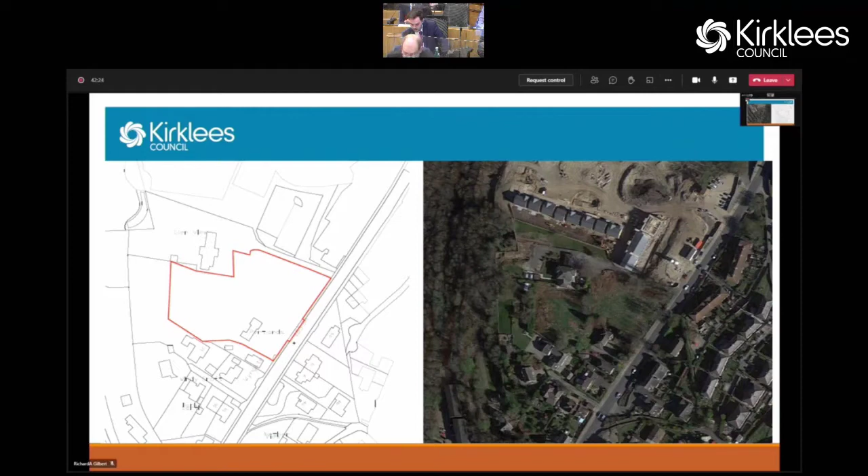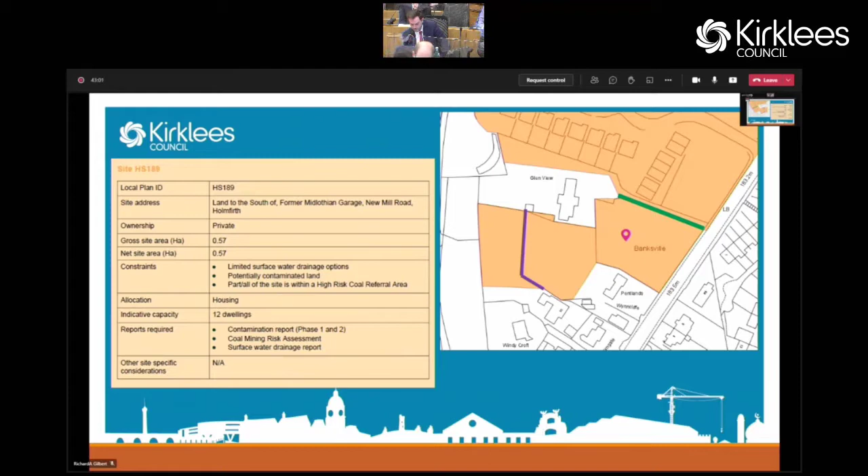As members will note from the previous slide, the allocated area extends further west of the purple line, indicating the westernmost extent of this application's red line boundary, whilst at the same time excluding the curtilage of the Pentlands dwelling house.

In respect to the characteristics of the site itself, the site consists of both the Pentlands dwelling, its surrounding garden space, as well as the grassland field defined as Banksville on the Ordnance Survey map. Most of the site is set on lower ground relative to New Mill Road, which is approximately 2 metres higher, and set on top of the stone retaining wall, which continues at a right angle across the northern boundary of the site, and which previously featured semi-mature trees along New Mill Road prior to their felling recently.

In terms of the surrounding area, it is predominantly residential in character. It's typified by a large mix of styles and sizes from most eras, including terraces, semi-detached and detached dwellings, spanning from the Victorian through to the contemporary periods. The use of natural stone as a finishing material is the prevailing shared feature typical of the Holme Valley area.

In respect of the development that is proposed, it has been subject to a significant number of revisions that I will run through now to provide context to how the latest site layout has been achieved.

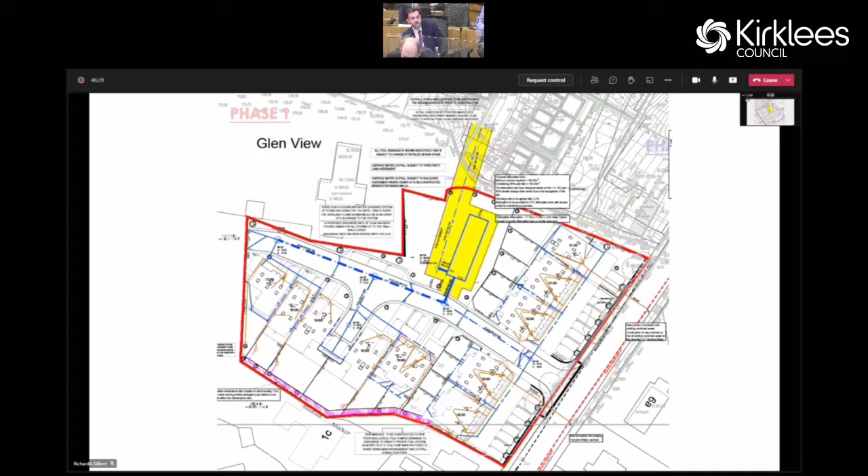This site layout presents the final site plan as issued to members for this committee meeting. Some minor amendments have been made to improve the quality of the development's appearance from public vantage points within the site, including provision of stone boundary walls in lieu of fencing at the rear of plots 1 to 7, indicated by the red lines on the plan.

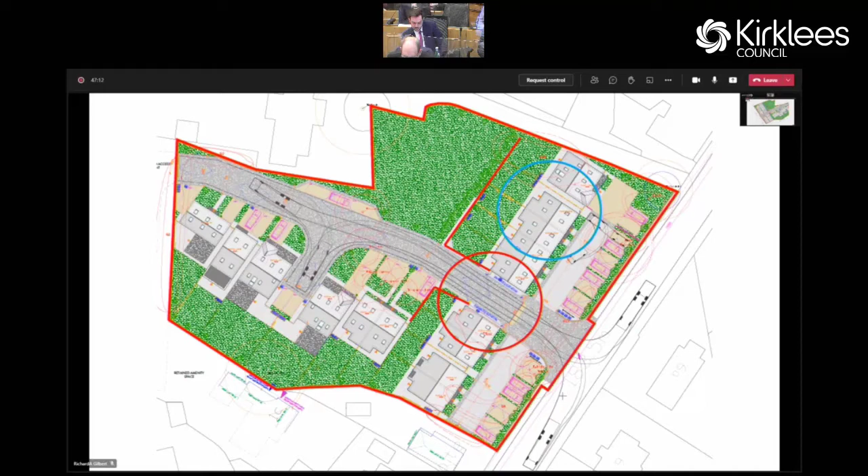The final amendment, outlined by the light blue circle, was a response to officers' request to remove plot 1, which is the northernmost detached dwelling from the scheme.

This request was made in order to further increase the space between the dwellings facing toward New Mill Road, as required by the House Builders SPD.

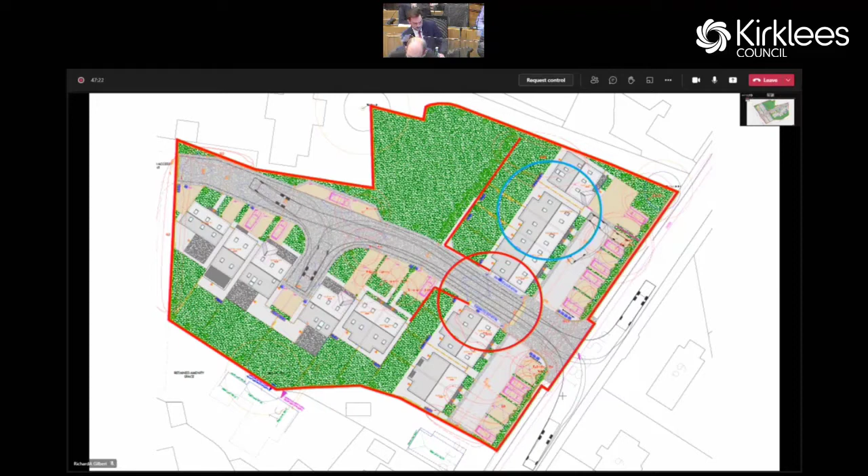The street scene from New Mill Road presents the applicant's response to the request to remove the detached plot from the scheme. The applicant's counter proposal was to combine plots 2 to 5 on the right-hand side to form a terrace of 4 units, enabling more space between plots 1 and 2.

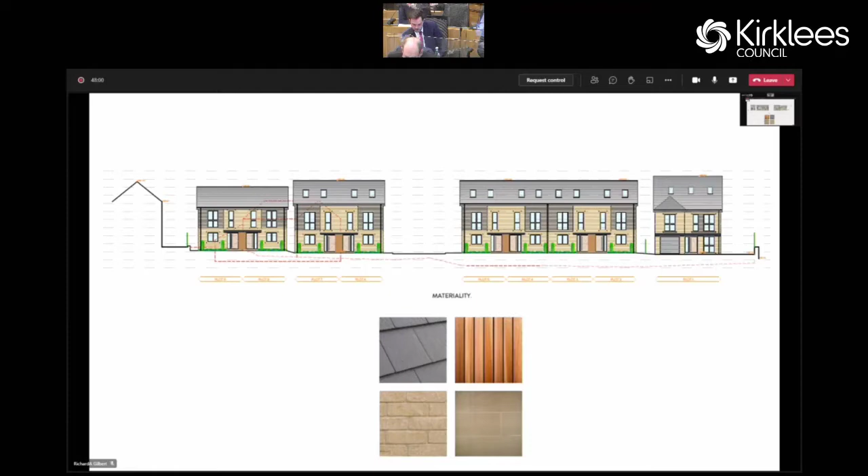This amendment meets the space standard required by the House Builders SPD. Terraced housing is present to the north-east of the site further up New Mill Road, so there is precedent for this form of design to be included within the proposal.

Nevertheless, the gap between the two plots of semi-detached houses on the left-hand side of the street view remains suboptimal.

To date, a total of 30 neighbour representations have been received in response to the Council's consultation and subsequent reconsultations, highlighting a broad range of issues including highway safety concerns, biodiversity and habitat loss, residential amenity and privacy issues, as well as loss of character to the area, to name the most common factors raised by local residents.

In terms of planning gain, the scheme is bringing forward a full affordable housing component of 3 units, 2 of which will be social rent and the other intermediate. This meets both the tenure split and total number of dwellings identified as required by those in need within the Holme Valley for a site of this size.

A sustainable transport contribution is also made of approximately £17,000, of which £7,000 is allocated to funding sustainable travel incentives, with £10,000 allocated for the upgrade of the adjacent bus stop.

As mentioned previously, the proposal is not able to demonstrate a sufficient level of on-site public open space, nor an achievable 10% biodiversity net gain, and an agreement in principle has been reached with the developer to provide contributions to fund off-site improvements elsewhere for the net gain and off-site open space.

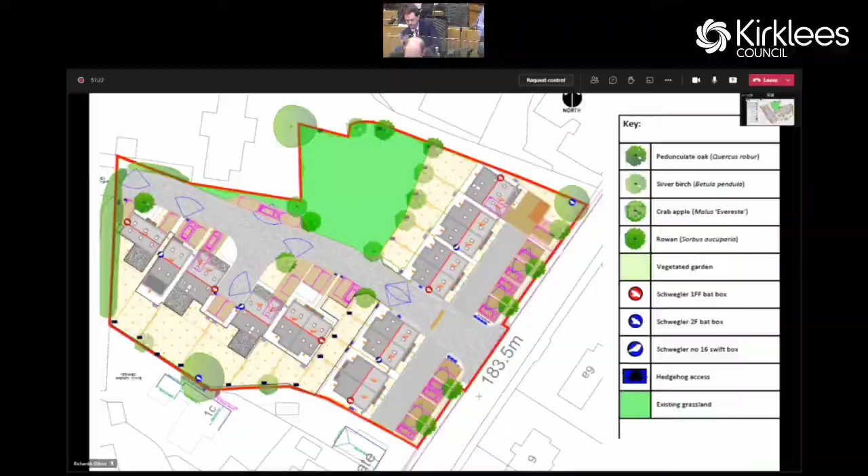Thank you. Quite breathtaking, that, wasn't it? Sorry.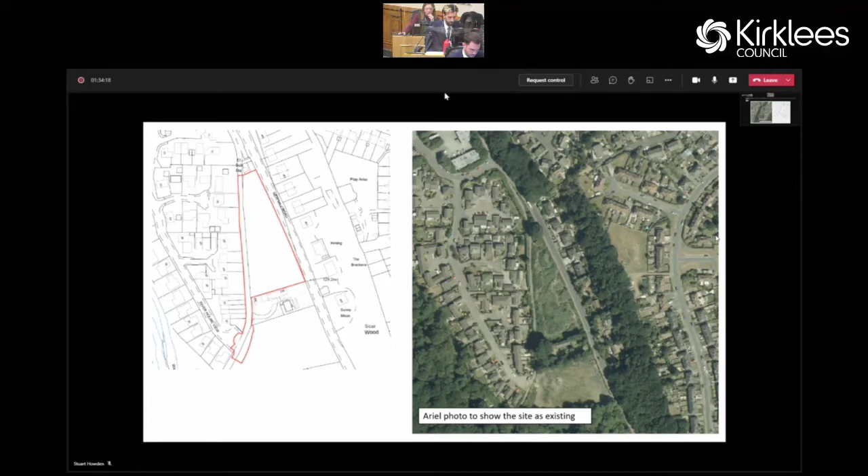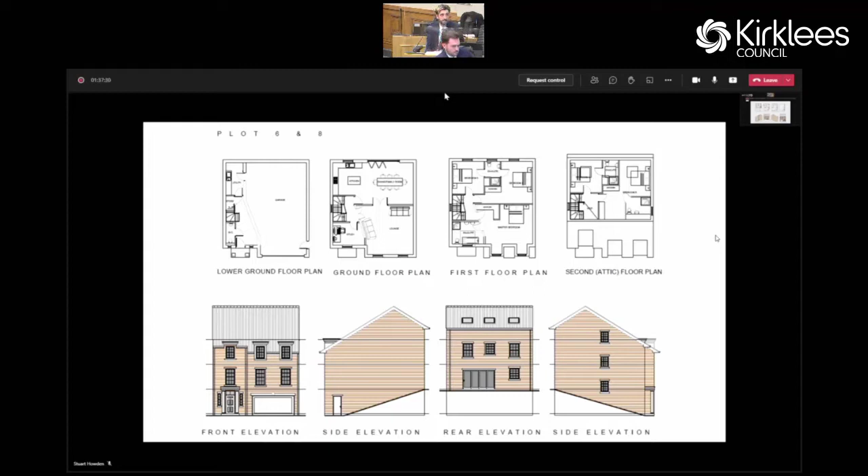The submitted application proposed that the dwellings were to be constructed from manufactured stone under imitation blue slate roofs, but as outlined in the written update, the applicant's agent has raised no objection to the use of natural stone in the walls after officers raised concerns with the manufactured stone.

Members have a full and detailed report in front of them. Officers consider the planning history of the site to form an important consideration for the assessment of the proposal, and section 4 of the report discusses this in some detail. Of note, outline planning permission was granted in 2016 for residential development on the site, and then reserved matters for 9 dwellings at the site was allowed at appeal on the 7th of January 2020.

This permission is for 9 detached dwellings at the site, but this is yet to be implemented, though it is still extant. In addition to this, the scheme before members is very similar to the extant permission at the site. The only differences initially proposed were that manufactured stone was to be used instead of natural stone, and that the agent wanted the road to not be offered for adoption.

However, as outlined in the report, officers had concerns with the use of manufactured stone, and as noted, managed to get an agreement to use natural stone here. Condition 3, which is recommended, has now been altered to be a compliance condition with the stone that was originally agreed under the previous application being used.

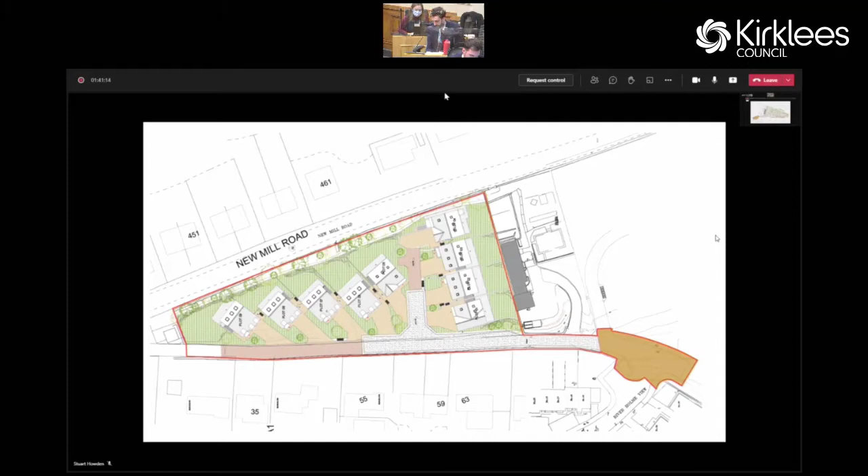So in light of the above, it is recommended that the local planning authority inform the planning inspectorate that they would have recommended the application for approval, subject to the conditions set out within the report, had the determination remained within its remit. So I've got nothing further to add. Thank you, Chair.

Thank you. No speakers, so members. Councillor Davis, Councillor Homewood, and then Councillor Uppel. Yeah, it's literally just a question on the issue of adopting the road, not adopting the road. Could you take us through that again in terms of explaining the context of that? Is this the issue of the road being adopted or not adopted?

If you're happy for me to... So, the road - I think the concerns are here that we're deciding on whether the road is unadopted or not, but that's not for us to decide, we can't condition that. We can condition that it's to an adoptable standard, and that's what we're doing in this instance.

And a highways engineer at Kirklees has raised concerns that if it wasn't to an adoptable standard, then this could have issues such as the maintenance of that. And following on from us recommending a condition in terms of it being to an adoptable standard, the agent here in this instance has raised no objection to that.

Can you just clarify, in terms of the public right of way of Lancaster Lane, does that mean - I think it refers to it being a footpath - is it only a footpath or a highway currently?

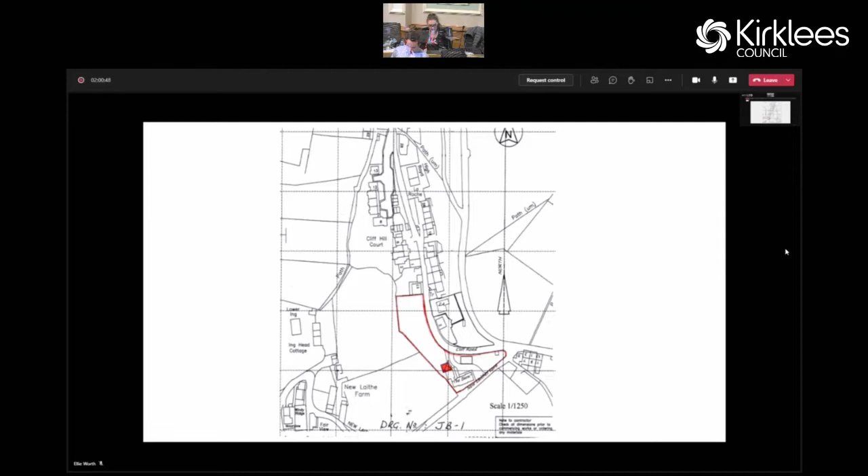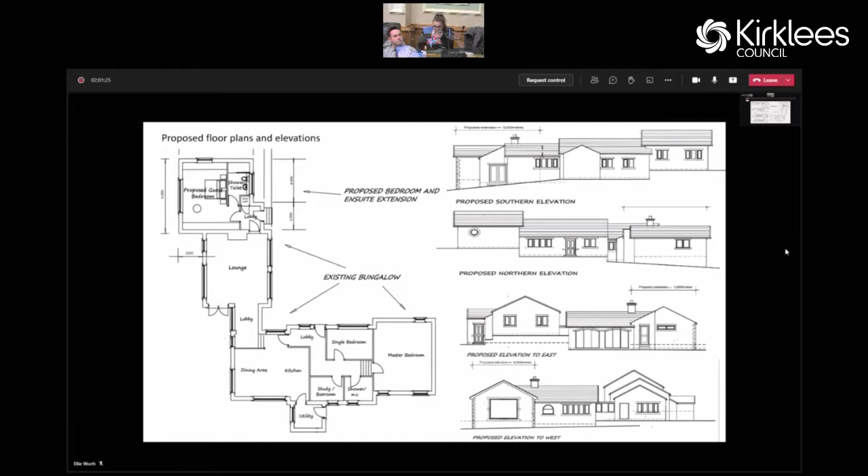As such, officers consider the extension to result in a disproportionate addition equating to a volume increase of 78% within the green belt, over and above what is considered original. For this reason, the proposal, in line with both local and national planning policy, would result in inappropriate development within the green belt. In this instance, no very special circumstances have been provided to outweigh the harm caused.

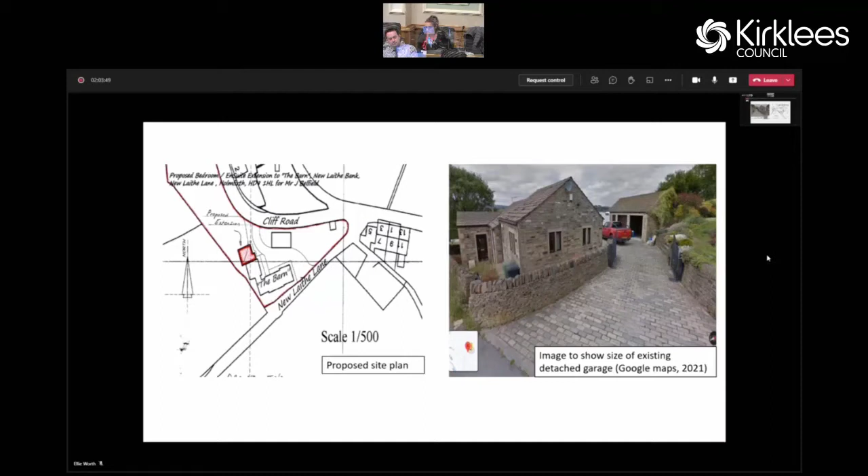Thank you. The first... It appears that I seem to be the only one that's here today.

Well, I did agree to this, basically because it was put by planning officers that it was an extension of what it already had, extensions including the double garage, which is not, when it isn't connected to the property, is not classed an extension. It's only a very small extension. It's going to save probably somebody putting in a plan for a house, a separate house in the area, which will be coupled again onto a sewage system.

So I much prefer to see a little bit of extended properties, which is when families grow up, of course, you need to extend a little bit, and if they can afford to extend, then there isn't a problem. Yes, it's in the green belt, but he's asked his neighbours are happy with it, and it's not going to stand out. In fact, it won't be noticed, but I'll leave it with the planning committee. If they think that it's wrong, then fine, but I'll remember that when other things come up as well. Don't worry about that. Thank you.

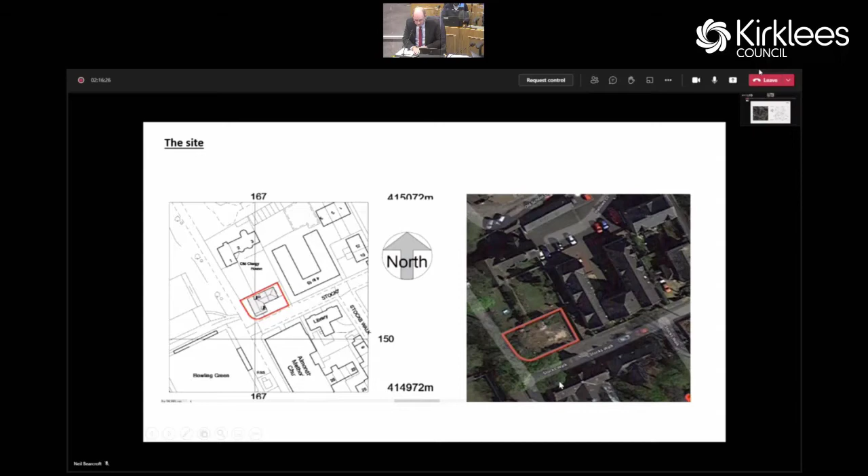The site can be seen on the slide outlined in red. There are a number of buildings opposite. To the north is a former old clergy house with 3 residential dwellings that also forms a Grade 2 listed building. There are some residential flats to the eastern side, and then a former Sunday school which is a community centre to the south. There are a number of protected trees around the site due to the site's location within the conservation area.

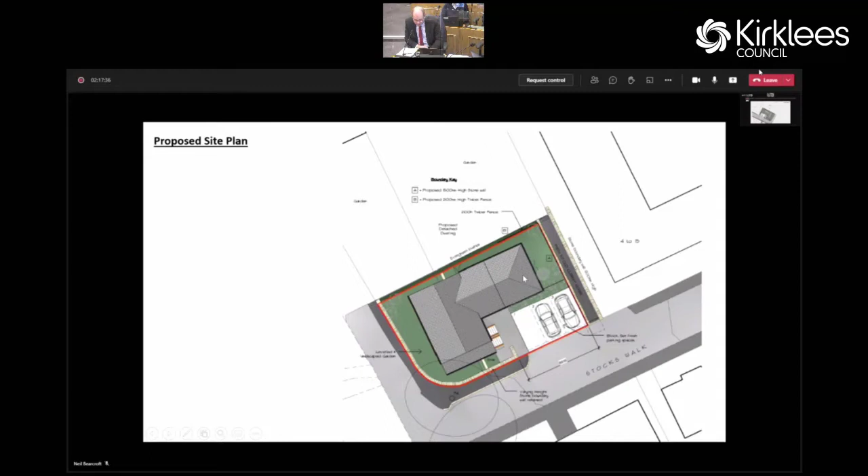As can be seen there, that would be the building located occupying most of the site, with 3 parking spaces adjacent to Stocks Walk. That would be the appearance of the property, constructed from natural stone, 2-storey, with some visuals showing colour, a single-storey element to the one side closer to the flats, and a projecting single-storey element, and then a 2-storey section as well.

Members have a full and detailed report in front of them, and officers consider the principle of developing the site to be acceptable, along with the proposal's design, its impacts on the adjacent heritage designations, the listed building and conservation area, and the provision of 3 spaces for the proposed 3 one-bedroom flats is also considered to be an acceptable arrangement.

The main issue with the scheme is its impact on the adjacent protected trees outside of the site, and the tree officers assessed this proposal in detail as set out in the report. The applicant has submitted an impact assessment which has also been considered.

There are concerns that the proposed building, which is located close to one of the protected trees, would require significant pruning to accommodate the building, which would disfigure the tree and threaten its public amenity. Furthermore, due to the proximity of the building to the tree, there would be an ongoing conflict that would significantly increase the pressure to fell the tree, and therefore the proposal would be contrary to policy LP33, which seeks to protect trees.

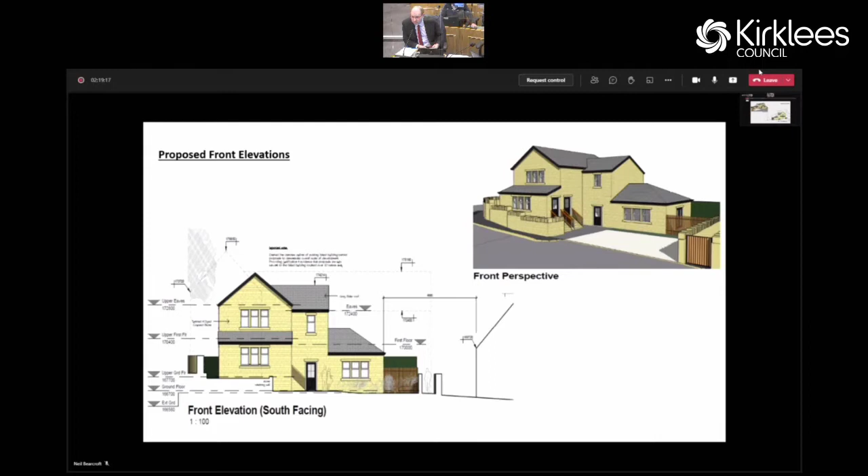Yes, sir. Paul Iverson. Yeah.

Afternoon, Chair and members. The application was submitted in January this year, and over the past 11 months we've worked proactively with the Council to provide a scheme that would be acceptable. We listened to the objections raised by the public and actively carried out significant amendments to the proposals to reduce the overall scale and massing of the building.

This included reducing the number of flats from 4 to 3, lowering ridge and eaves heights, and reducing the overall footprint. Following this, we ensured the building would not over-dominate the listed building to the north and cause little impact on the property to the east.

The parking proposals have been approved by Highways, the design has been approved by Conservation Heritage, and we have addressed the objectors' concerns. The drainage is not an issue and is something which can be overcome with good design.

The tree officer requested an arboricultural impact assessment which we provided, and following this we amended the design again to minimise excavations for foundations by retaining existing ground levels to the west of the site, which prevent any impact on the roots of the neighbouring trees. It was also recommended that one tree should have minor pruning and crown lift, but would not be adversely affected.

The tree officer objected to this, and his main issue was potential nuisance shading caused by the tree, which could lead to pressure for the tree to be pruned again in the future. We believe this reasoning to be unjustified, given that we are assuming the pruning will be required, and see no reason why this could not simply be addressed by a planning condition restricting any further pruning without written consent.

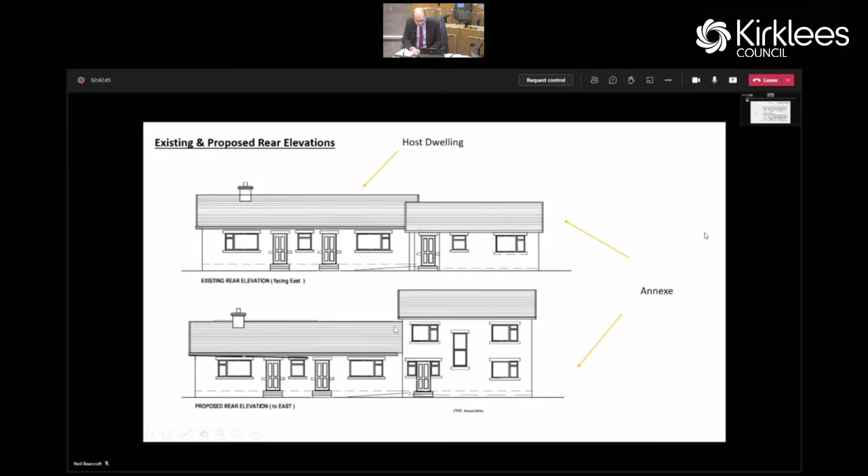So the top drawing is the current situation, below is the proposed. So the application proposes to erect a first floor extension above the existing annex in its entirety, and also a two-storey side extension that can just be seen there with a new entrance door. It will be constructed from random Yorkshire stone to match the existing and a slate grey roof. That's the rear elevation, just showing again the extra floor built straight above the existing and its relationship with the existing bungalow, which is the main dwelling on site.

So in terms of assessment, members have a full and detailed report in front of them. However, in summary, the key considerations of this scheme are its impact on the greenbelt and also the design of the extension. With regard to the greenbelt itself, the existing annex represents an extension to the host property approved in 2008, and a further addition of the first floor would equate to additions at the site being over 50% in terms of volume, or 57% in terms of footprint.

Such a scale of addition, and its first floor nature, is considered to lead to the proposal representing a disproportionate addition to the host property, which is originally the bungalow, and would form an inappropriate development within the greenbelt. Inappropriate development in the greenbelt should not be approved except in very special circumstances. While some have been put forward by the applicant, these mainly relate to personal circumstances where officers can only give limited weight to these. It is therefore considered the harm to the greenbelt is not outweighed by the circumstances put forward, and the application will be contrary to policy 13, chapter 13 of the NPPF and policy 57 of the local plan.

Furthermore, in relation to the design, the proposal is for the additional floor on top of the annex, which would lead to the annex being significantly taller than the main bungalow, and is considered to not represent a subservient addition to the host property. It would form an unsympathetic, incongruous and overly prominent addition to the host property, contrary to LP24 of the local plan, and policies in the SPD, chapter 12 of the NPPF, and also policies in the Holme Valley neighbourhood plan. For these reasons, the application is recommended for refusal. Nothing further to add, Chair.

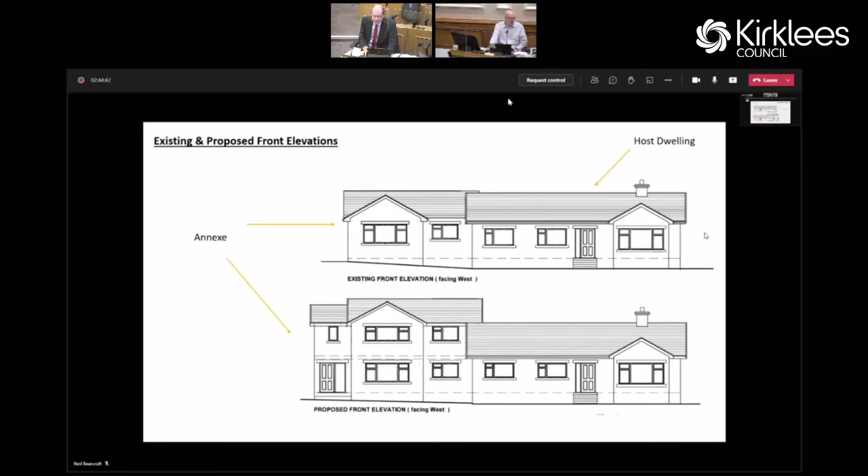Thank you very much. This is at the end of Dover Lane. It's an extended family. The granny flat has been extended for the gentleman's son and daughter-in-law as part of the setup. Rather than build a separate new house, they decided this was a good way to do it. I can't fault it because the guy himself is a builder, a local builder, so it's been built with taste. And it's right at the bottom of Dover Lane.

Is it that the neighbours don't mind? There's nothing spoiling the greenbelt outlook or attitude of the greenbelt. As far as I can see, there's no problem. But obviously we've been finding problems here all morning, haven't we? I suppose we'll have to go along with what everybody else says.

And I would ask this question. All those plans up to press, apart from one, I visited them all. How many of the planning committee have visited any of these plans that's been put forward this morning? I would like to know that. Thank you. And as I said, I'm for it, not against it. Thank you.